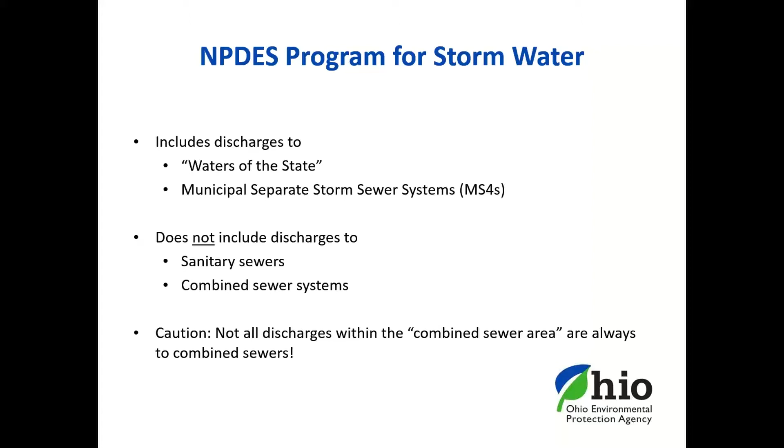Moving on. Here's 11 categories of industrial activity. Basically, Ohio EPA's rules mirror US EPA's federal regulations, which identify these 11 categories of industrial activity, which are subject to NPDES stormwater permitting. And within these 11 categories, the federal regulations and Ohio EPA's mirror those regulations. Facilities are identified by standard industrial classification codes, so SIC codes. So the regulations will spell out what SIC codes are subject to stormwater permitting.

There's also within the regulations a few facilities that are identified by a narrative description. An example would be a wastewater treatment plant, which has a design flow of 1 MGD or greater. So that's identified by a narrative description.

Within the permit itself, Appendix D of our industrial stormwater general permit, it lists out all the different facilities by SIC codes and narrative descriptions which are subject to that permit. So you can look at Appendix D of the permit, or also within Ohio EPA's rules to identify those facilities which are subject to NPDES industrial stormwater permitting.

For facilities that are subject to industrial stormwater permits, there's two options for permitting. One, you can obtain general stormwater permit coverage, or some facilities are covered under individual NPDES permits for their stormwater discharges. This is very common for facilities that already have an NPDES permit for a wastewater discharge.

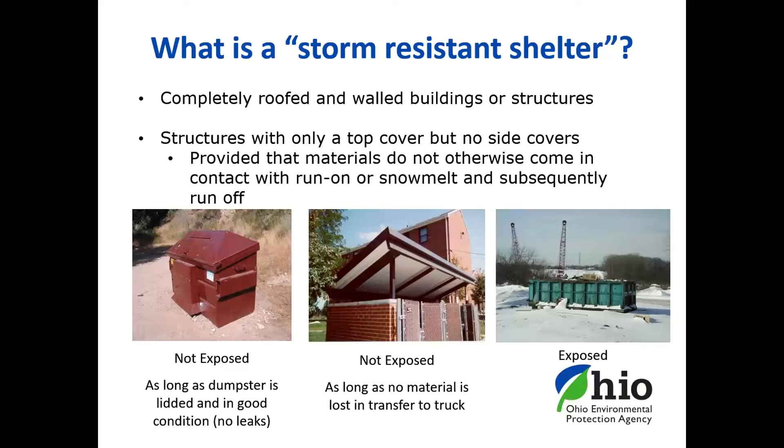The regulations do have some exceptions to storm-resistant shelters. That would be for tanks, drums, or barrels. Those can be stored outside and exposed to stormwater as long as the drums and barrels are sealed with no operational valves, they're in good condition, and there's no transfer of material to or from that container outdoors. So that would have to be done indoors, but then they could be stored outdoors as long as they're in good condition.

Another exception is adequately maintained vehicles. An example could be forklifts and trucks at an industrial facility that travel from building to building outdoors. As long as those vehicles are maintained and not leaking oil and stuff, those would not be considered exposure.

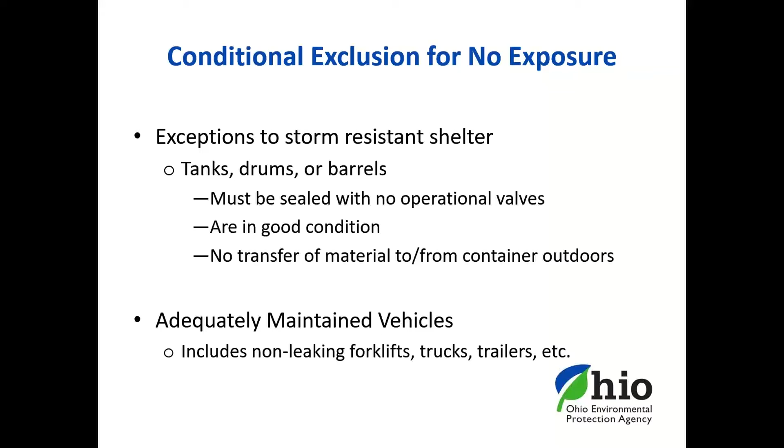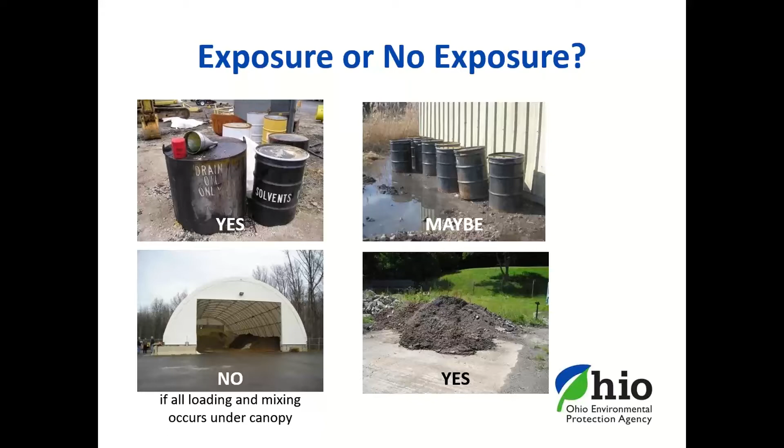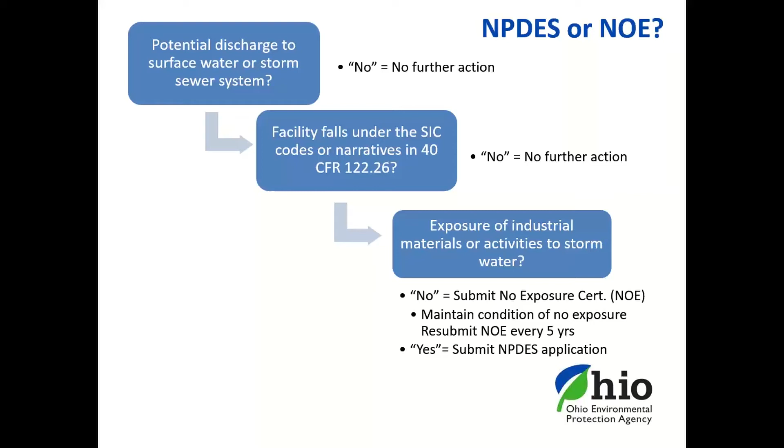We've come to our first poll question. Does your facility have NPDES industrial stormwater coverage?

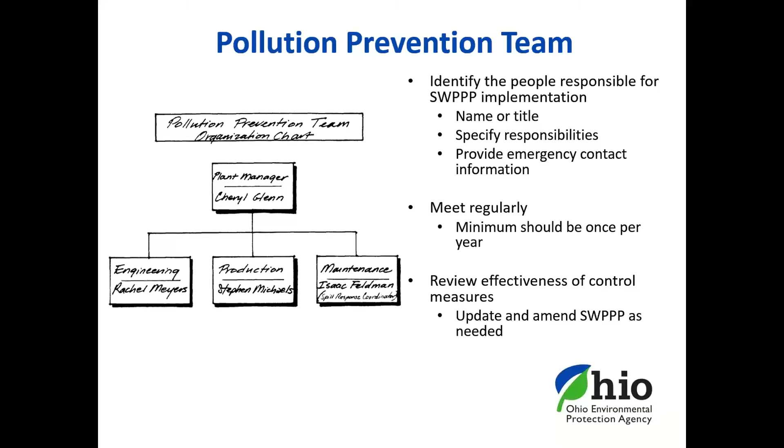Potential pollutant sources, just some typical areas at facilities that have potential pollutant sources: storage tanks, including fueling stations, various stockpiles of materials, dumpsters, loading docks, rail lines, dust collectors, scrap bins, areas with bare soils or where construction may be occurring at the site that have exposed sediment, and outdoor manufacturing areas. These are some of the common potential pollutant source areas at various industrial facilities.

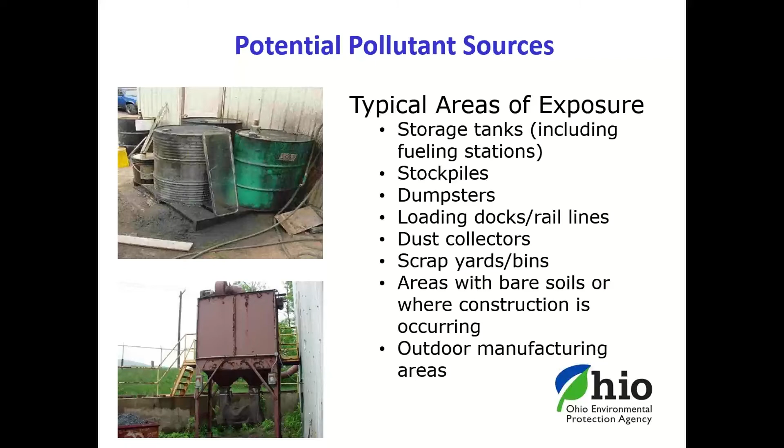The site drainage map, this is really important for facilities. It should identify the location of those pollutant sources and various controls that you're going to be implementing to try to minimize pollutant discharges. Drainage patterns, this could include both your storm sewers, catch basins, and then also any sheet flow that may leave the site over land and not be discharged through a storm sewer. And then also delineate the watersheds, what are the different watersheds at your facility.

Points of discharge, outfalls. A lot of times we get calls from facilities and they're wondering, where do we take our stormwater samples? You should be able to look in your stormwater pollution prevention plan, and it should identify where your points of discharge are and where you'll be taking those samples. And then the plan or the drainage map should also identify the name of all receiving streams and/or any local MS4 storm sewer systems. So it might be a roadside ditch, and/or it might be the city or village's storm sewer system.

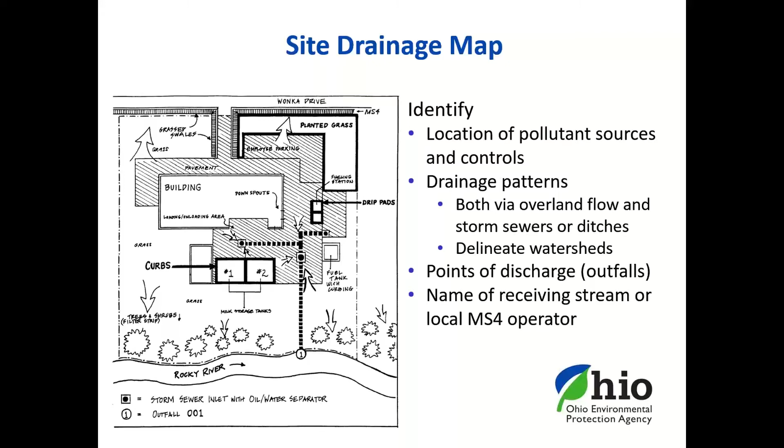Non-stormwater discharge certification. The permit does require facilities to certify that they've evaluated and have no non-stormwater discharges from their facility. So this could be a sanitary discharge accidentally connected to your storm sewer and having a discharge. It might be sink drains, floor drains.

But the permit does require that facilities do a system check at a facility, dry weather screen their outfalls, and try to determine if they are having any non-stormwater discharges that shouldn't be discharging through their storm sewer system. If they were to find any, the permit would require they be eliminated. One common question we get is, I'm a facility that's had a permit for 3 generations. I've already done this non-stormwater certification 10 years ago.

Do I need to do it again when I renew my permit? And basically, our response has been, if there's been no major construction or anything like that done at your facility where there would be a chance to have a cross connection of some kind to your storm sewer system, then you would not need to redo it again.

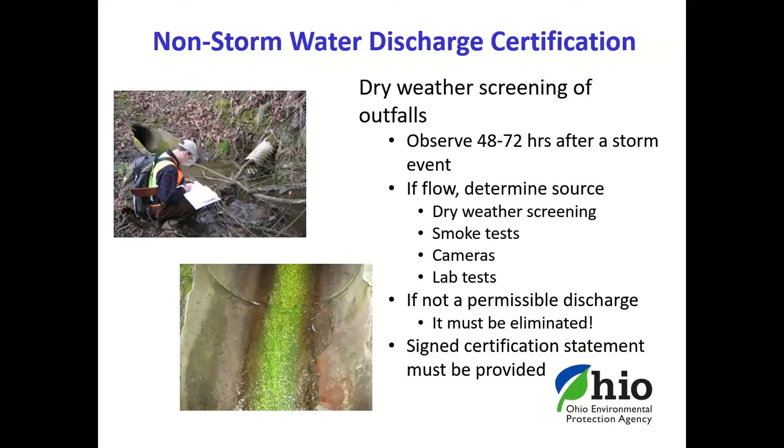The general permit does identify some permissible discharges that are non-stormwater, but they are allowed. So firefighting activities, if there was a true fire event, those discharges would be authorized, as you see in parentheses, non-planned. This is consistent with federal regulations. So for any type of facility doing a planned firefighting event, those discharges would not be authorized by the permit and need to be collected and dealt with appropriately.

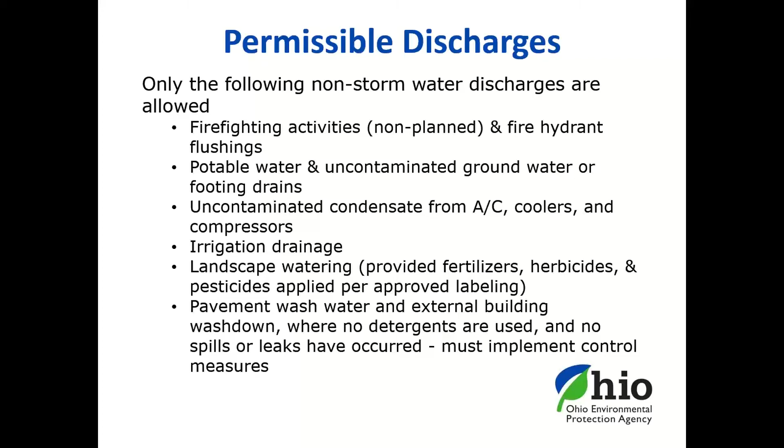Potable water, uncontaminated groundwater, uncontaminated condensate, landscape watering, pavement wash water, and external building wash down. Those are allowable discharges as long as no detergents are used. I think we've got a slide that talks a little more about that. For the non-stormwater discharges for exterior washing, again, the permit does authorize routine external building wash down without detergents. So if you're just using water.

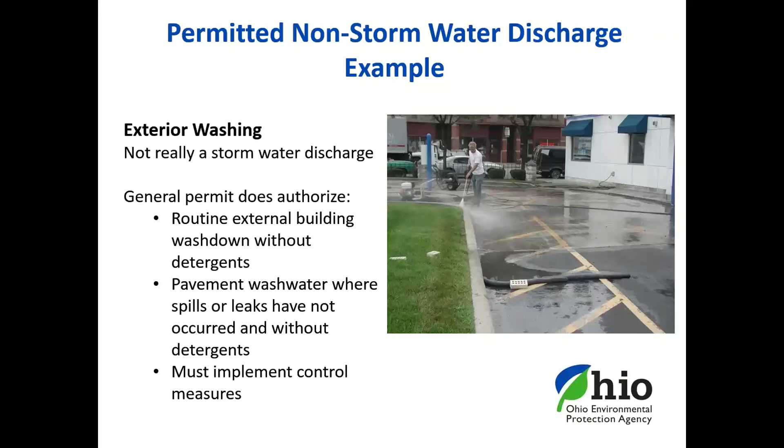For pavement wash water where spills or leaks have not occurred and without detergents, the permit does indicate you need to implement some control measures. So, maybe sweep the pavement before it's washed and then implement some type of control measures. Maybe try to direct it to a grassed area or try to have it go through something to minimize the amount of solids that might be discharged. So it does require control measures to be implemented.

Regarding control measures with the stormwater pollution prevention plan, the permit does identify various control measures that need to be implemented. And basically, like I said, parts 1 through 5 of the permit apply to everybody, and those will identify some control measures that everybody's plan must include. And then you need to look at Appendix D of the permit, and based on your SIC code, that'll tell you which sector in Part 8 of the permit is applicable to your facility. Part 8 of the permit would identify specific BMPs based upon your type of facility that your stormwater pollution prevention plan would need to include and implement.

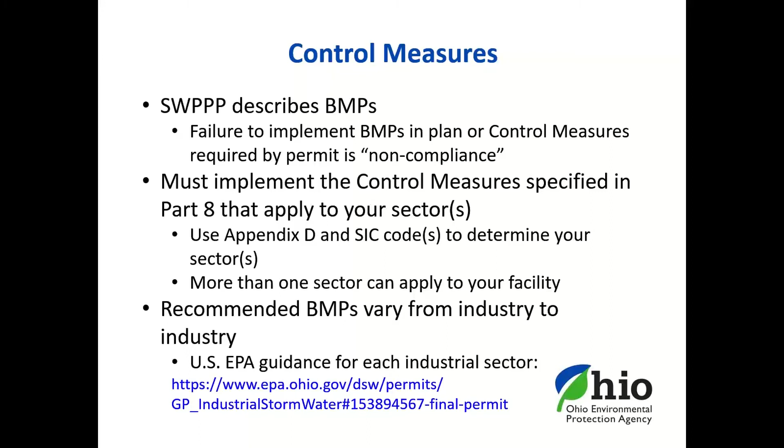The link at the very bottom of the slide: US EPA has developed guidance documents for every industrial sector that's in Part 8 of the permit. And those are really good documents to look at for your facility. Regarding control measures, these are just best management practices. So, one of the big things is just try to use common sense when selecting BMPs. A lot of times it just involves curbing, diking, tarping, moving things indoors if possible, and then just general sediment erosion control at your facility.

Regarding SPCC or other spill control plans, that is one of the control measures that the permit does require. If your facility already has an SPCC plan, obviously you can just utilize that to address that control measure in the permit. And then don't overlook the value of regular employee training. The permit does require at least an annual employee training regarding your stormwater pollution prevention plan. But obviously, more frequent trainings could be better, especially if the facility has a lot of turnover.

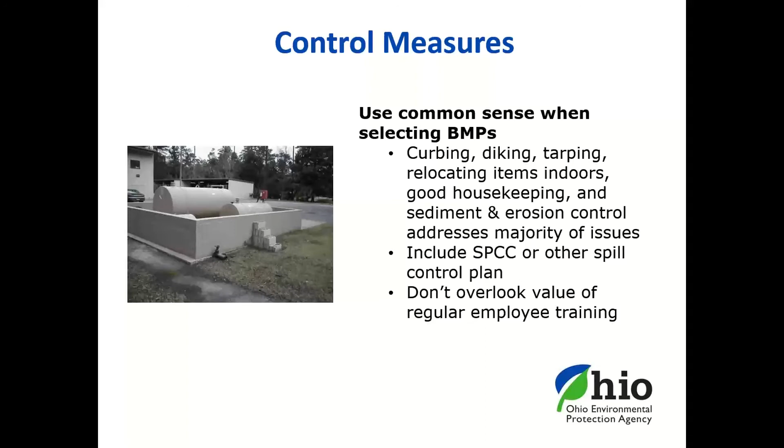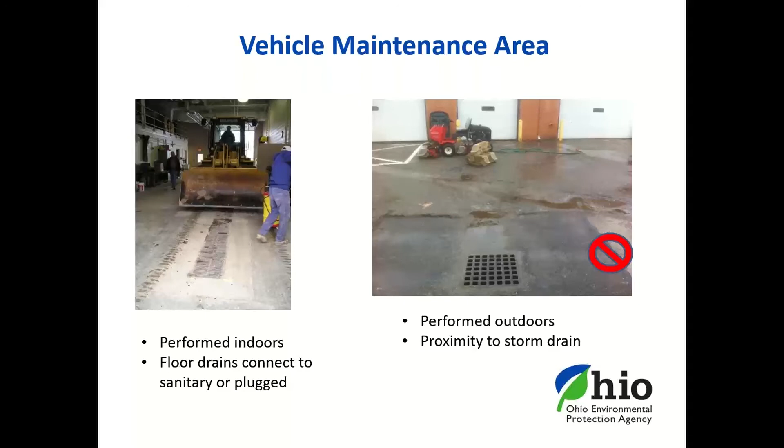Now let's go through a few slides of some common areas where we commonly see pollutant sources, and some good and bad examples. The picture on the left, the vehicle maintenance is performed indoors, which is great, with the floor drain connected to the sanitary or plugged. The picture to the right, they're doing the maintenance outdoors, and it's in close proximity to a storm drain, which would not be good practice.

Equipment storage: basically, when equipment's being stored, if it's possible, all fluid should be drained before storing, or use drip pans for any leakage. If possible, put it underneath overhangs. And then also use absorbents to clean up any spills. And facilities should have spill kits and stuff available to do that.

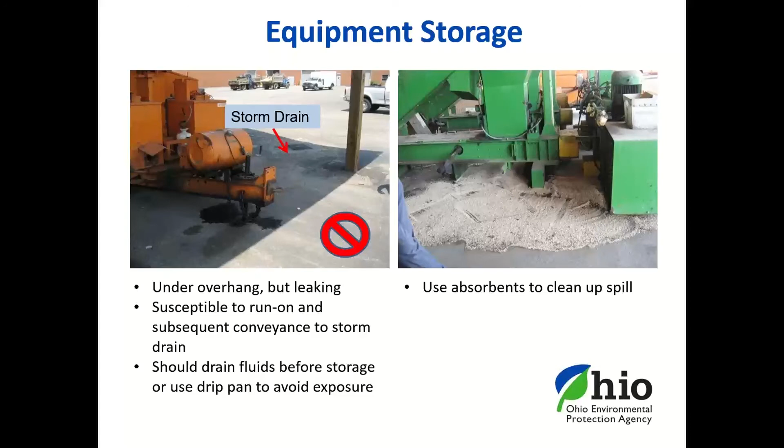Vehicle washing. We see this quite a bit. Facilities washing vehicles outdoors. And again, the wash water that comes off these is not storm water. It's technically a wastewater, so it cannot be discharged via your NPDES stormwater permit. Some viable options would be to use a standard commercial car wash if possible, or some facilities have actually created wash bays and connected that to the sanitary sewer.

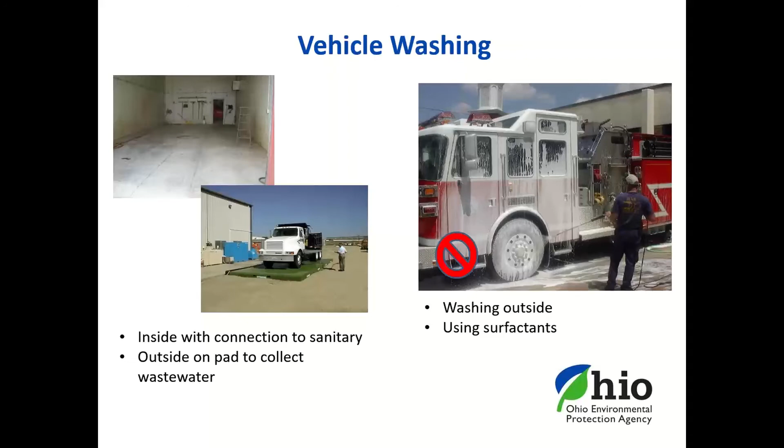Material storage: just a good practice is to store materials indoors, neat and orderly. Don't store things outside. And then definitely, if it was to be stored outside, try not to store it in close proximity to a storm drain.

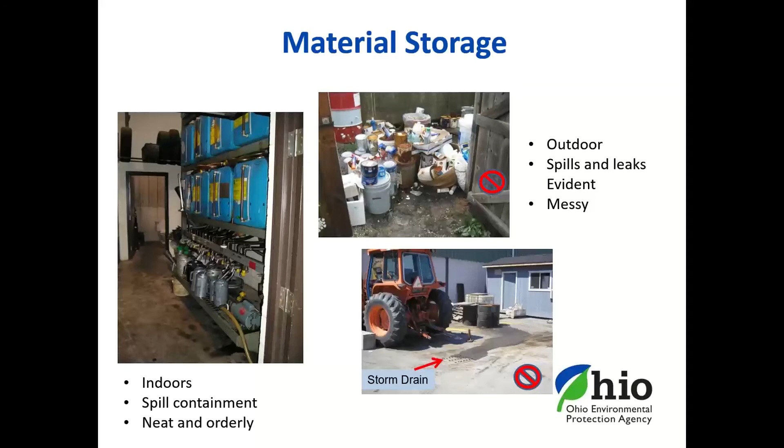Salt storage. Now, the permit does require that if you have any salt storage at your industrial facility, it must be covered. So obviously, the pictures: the one on the left's a good, nice salt dome. The one on the right, salt just bulging out of it.

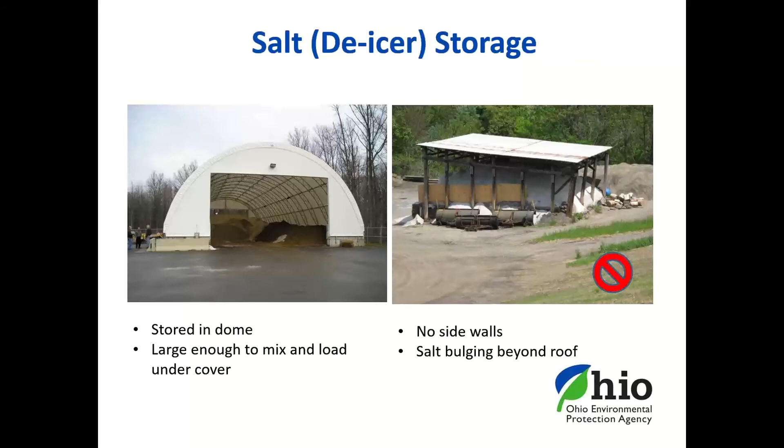Fueling stations: some good practices at fueling stations are to have auto and emergency shutoffs for the fuel pump. Keep a spill kit nearby, and make sure as part of your program, your stormwater pollution prevention plan, that those spill kits are checked regularly and refilled if needed. And then obviously the picture on the right, no spill kit was available. Pretty messy, stains, spills.

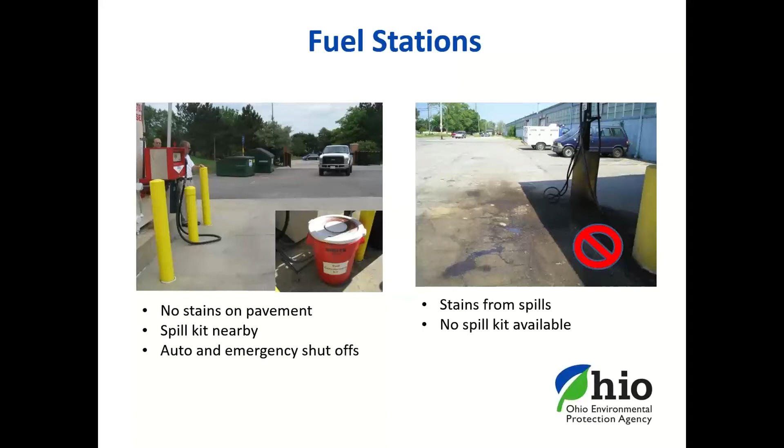Fuel tanks: secondary containment is a great practice. The picture on the right had dikes on three sides of it, except for the side that was draining downslope, with the storm drain being downslope of that.

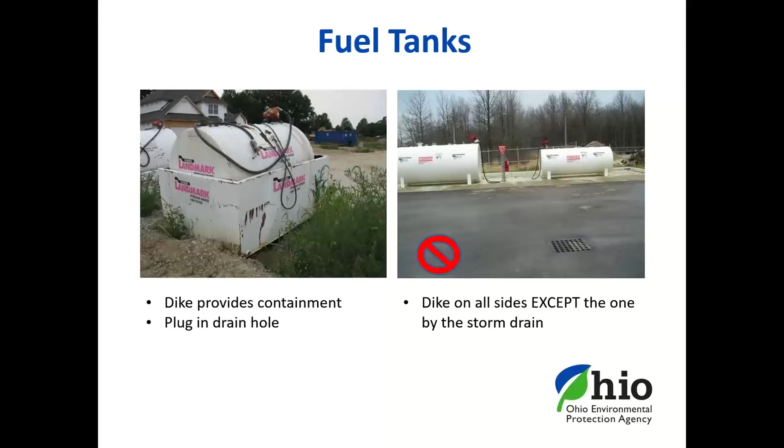Dumpster management. With dumpsters, facilities should try to keep dumpsters that are in good condition. They're not leaking, they're not ruptured. And then lids. We try to make sure that employees keep the lids closed on the dumpsters.

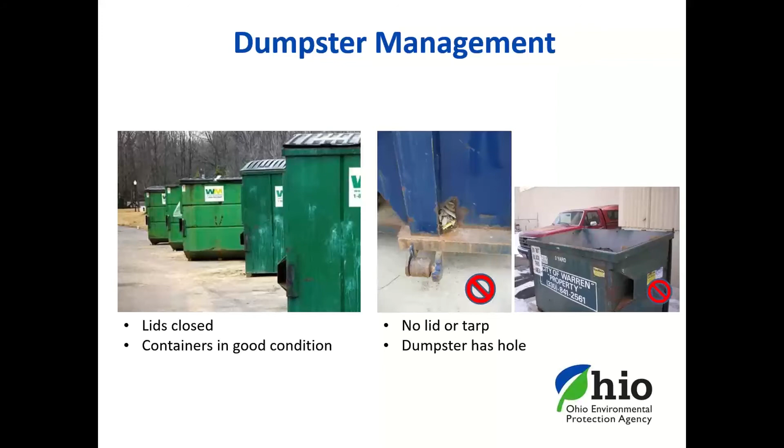Scrap materials in your yard. Good practice is to try to recycle or salvage any material that you can, and what you can't, quickly dispose of. If any type of machinery or vehicles must be stored outside, if possible, drain fluid from them prior to doing so.

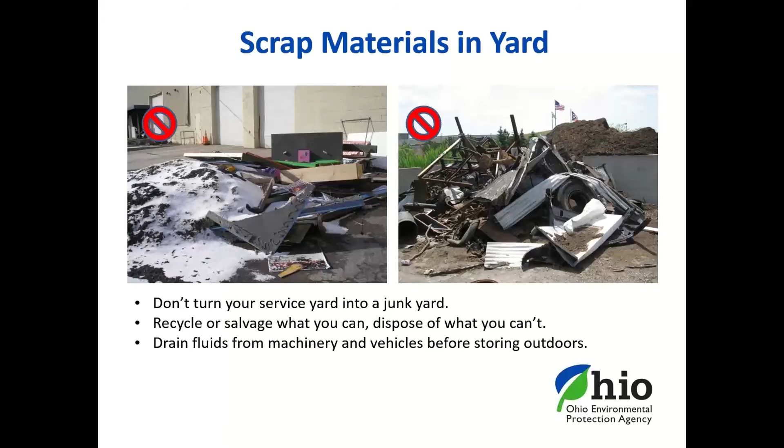And we come up to our second poll. The question is: discharges from planned firefighting exercises are an authorized discharge under the NPDES Industrial Stormwater General Permit. All right, we have opened the polls. Once this shows up on your screen, please make your selections.

So roughly 70% of folks have responded. Let's give it a few more seconds. Okay, we're going to close the polls and share the results. Okay, based on the results, 50% said that it's true, 50% false.

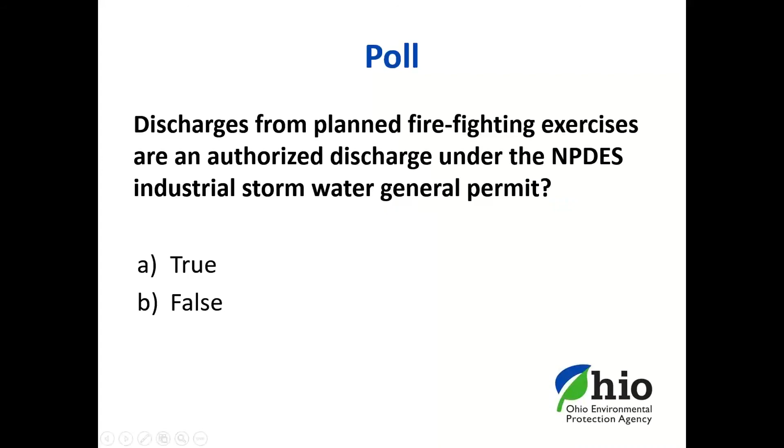So moving on to our next slide. Inspections and monitoring. So part 4 of the permit deals with inspections. All facilities covered under the permit are required to perform routine facility inspections, so must inspect once per quarter. Areas that should be inspected are areas where industrial materials or activities are exposed to stormwater. And also, inspections should look at any stormwater control measures that you have to make sure they're adequately working and being maintained.

There are certain sectors of industrial facilities under the permit that have more frequent inspections, and those are identified in Part 8 of the permit. So, based on your SIC code, when you go to the sector in Part 8 of your permit, there are a few sectors that require monthly inspections in lieu of quarterly.

The permit does say that the routine facility inspection needs to be performed while the facility is in operation. And then routine facility inspections need to be documented and maintained on site with your stormwater pollution prevention plan. And there'll be a link at the end of this presentation where we have example template routine facility inspection documents that facilities can use to document their routine facility inspections.

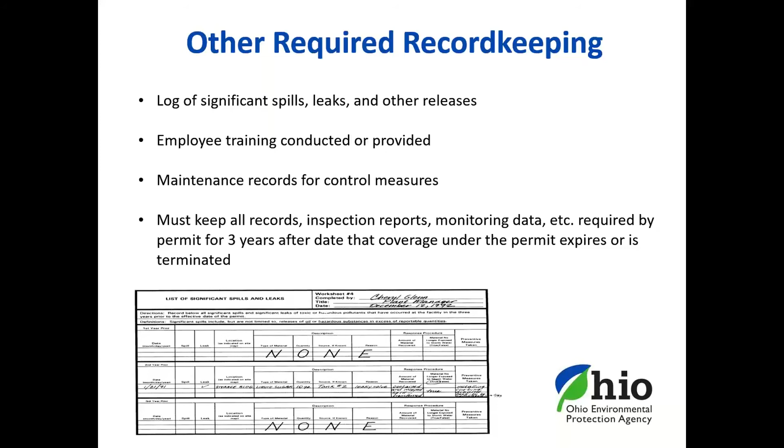Some other record keeping required by the permit: you need to keep a log of any spills, leaks, or other releases that you have in your facility. The permit requires that you document the employee training that you conducted and any maintenance records for control measures, and the permit requires that all records, inspection reports, monitoring data, et cetera, be maintained for 3 years after the date that coverage under the permit expires or is terminated.

Quarterly visual assessments. This is a requirement for all facilities covered by the permit. This is a simple grab sample where you're basically just visually looking at the sample for color, odor, clarity, floating solids, suspended solids, foam, oil sheens, and any other obvious indicators of stormwater pollution. So it's not required to be sent off to a lab or anything. It's just a visual assessment of the grab sample.

The permit requires that this grab sample be taken during the first 30 minutes of a discharge, and it needs to be at least 3 days after the previous rain event. So basically, we want at least 3 days without Mother Nature washing off pollutants, to give you a good representative sample.

The permit does have language regarding what is referred to as substantially identical outfalls. A substantially identical outfall is where you have 2 outfalls, and in the drainage area to those outfalls you basically have the same industrial activities going on and the same materials stored there. The permit says instead of taking a grab sample at each of those 2 outfalls, you only have to take a sample of one of them. And then the permit would just stipulate that the next quarter you rotate and take a sample of the other.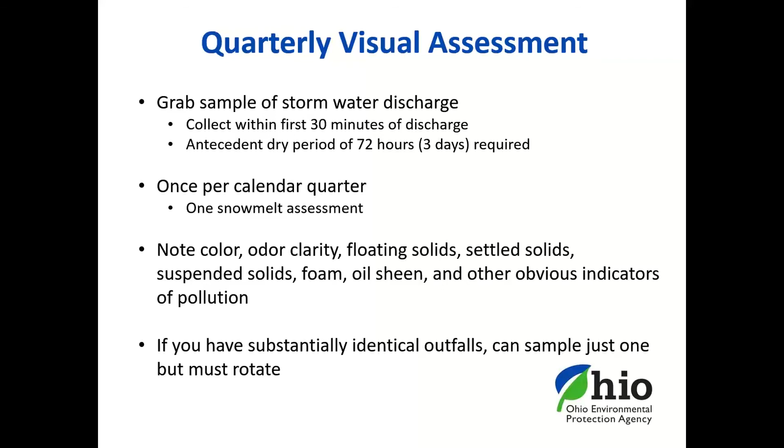The permit does have analytical monitoring. So these would be grab samples that would actually have to be sent to a lab to be analyzed. This would be for benchmark monitoring and annual effluent limitation monitoring. Within the permit, there are 29 sectors, and to determine this, you look at Part 8 of the permit based on your SIC code. 19 of the 29 sectors are subject to benchmark monitoring, and just a handful of facilities are subject to effluent limitation monitoring.

So if your facility is subject to benchmark monitoring or annual effluent limitation monitoring, it's similar to the visual assessments. You need to pull the sample within the first 30 minutes of discharge. It needs to be at least 3 days from the previous storm event. For benchmark monitoring and annual effluent monitoring, you need to coordinate with the lab, and those samples will need to be submitted to the lab. The permit stipulates that you need to go into eDMR, found within Ohio's eBusiness Center, and submit your lab results within 30 days of when you get your results back from the lab.

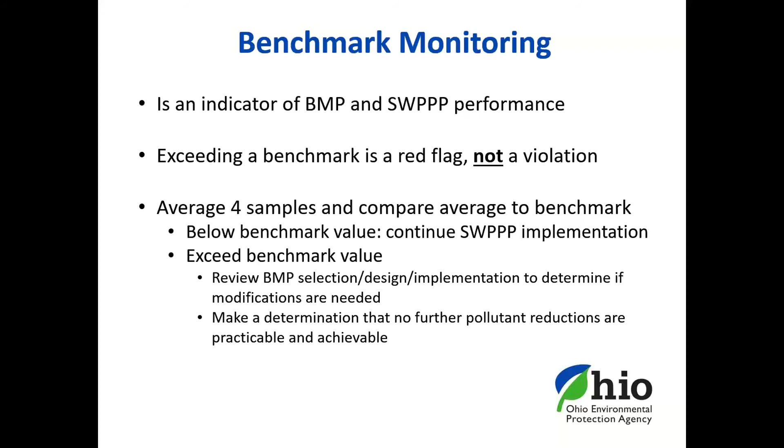Effluent limitation guidelines: there's very few facilities that are subject to this. Now these are actually limits. So if your sample violates these, it would be an actual violation. And with the effluent limitation monitoring, facilities can find out whether they're subject to that based upon the sector that they're located within in Part 8 of the permit.

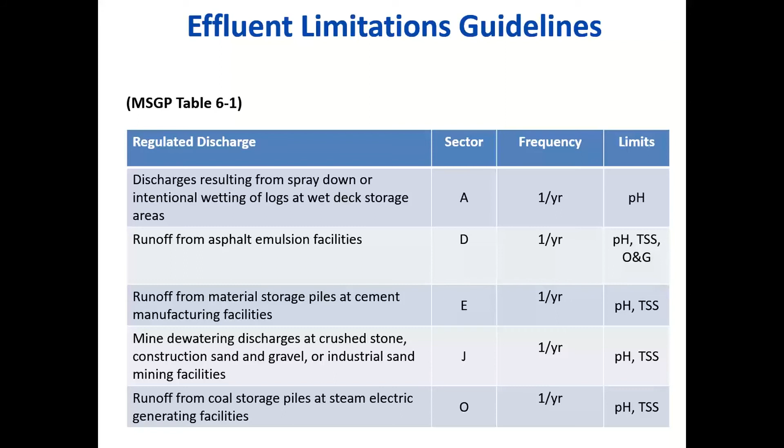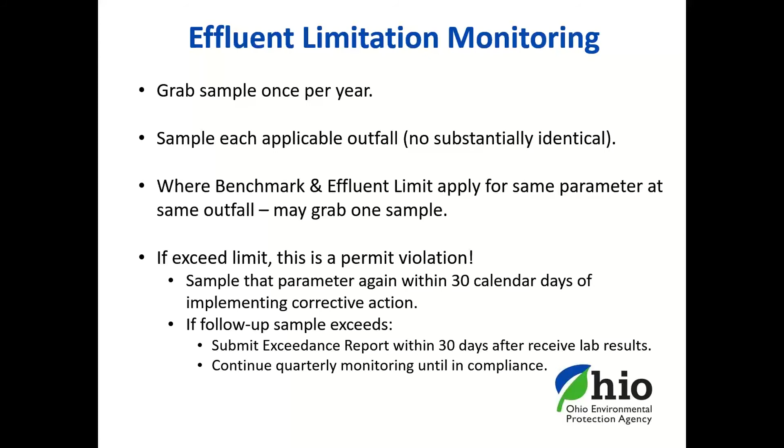And with that, it's very similar to the benchmark monitoring. It's just a grab sample. With this, though, you cannot use the substantially identical outfalls. So if you had 2 outfalls that were substantially identical, you would still need to take a grab sample from each and send that off to the lab to be analyzed.

Other monitoring: the permit does give the director authority, maybe based upon a facility's compliance and issues they may be having, to potentially require additional monitoring other than what is found within the sector that the facility is located in. That would be an option, or maybe require the facility to go under an individual permit.

Corrective action. This is found in Part 3 of the permit. So there are some things that would trigger corrective action in Part 3 of the permit. Some are true permit violations: you have an unauthorized release or discharge from like a spill or something, violation of a numeric effluent limit, or an inspection finds that control measures are not properly operated and maintained. So things like that would actually be permit violations and would trigger you to go through the corrective actions in Part 3 of the permit.

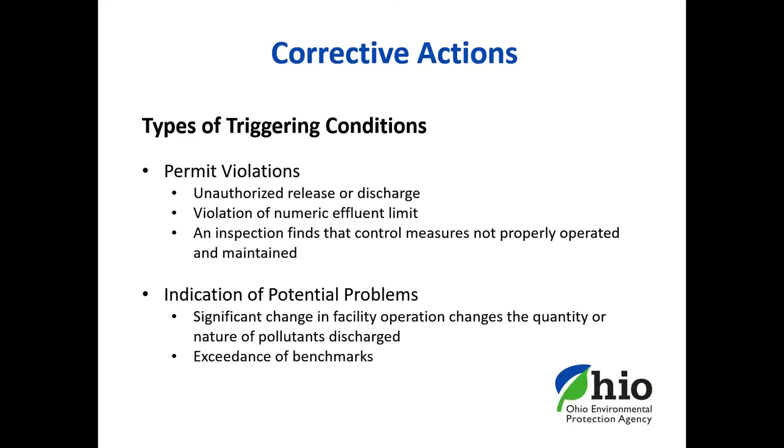Others would be indications of potential problems. So a significant change in the facility operation changes the quantity or nature of pollutants discharged, or an exceedance of a benchmark value. Again, it's not a permit violation, it's just a red flag. So these types of activities would require you to go through Part 3 of the permit and corrective actions.

The permit stipulates that within 24 hours of when you find this out, you document this and keep it with your stormwater pollution prevention plan; you describe the problem identified and document the date the problem was identified. Within 30 days, summarize the corrective actions that you've taken or will be taking, or the basis for determining that no action is needed, and document the date corrective action was initiated, completed, or expected to be completed. So basically, the permit requires you to document what you're going to do and when you do it.

The permit does require that an annual report be completed for all facilities covered under the permit. Ohio EPA currently does not require this annual report be submitted to Ohio EPA. The permit just requires that you complete the annual report, which is an appendix to the permit, and you maintain that annual report with your stormwater pollution prevention plan and have it available if your site was inspected or if Ohio EPA was to request your annual reports.